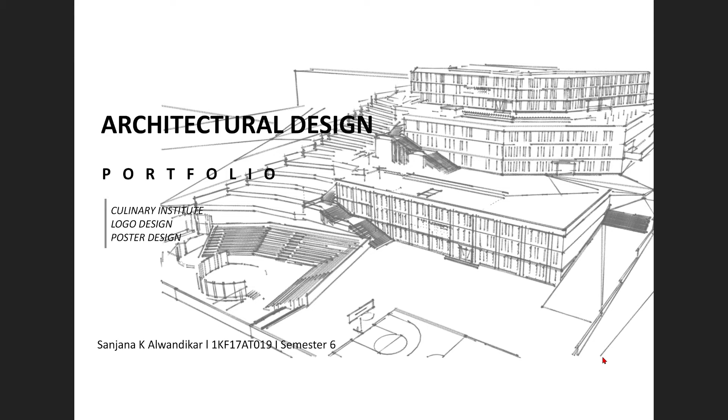Starting with the design of Culinary Institute, the site is located in Malasandara, Bengaluru, and in the context of the site, there are institutions and residential plots. As you can see, it is a highly contoured site which is about 3.5 acres.

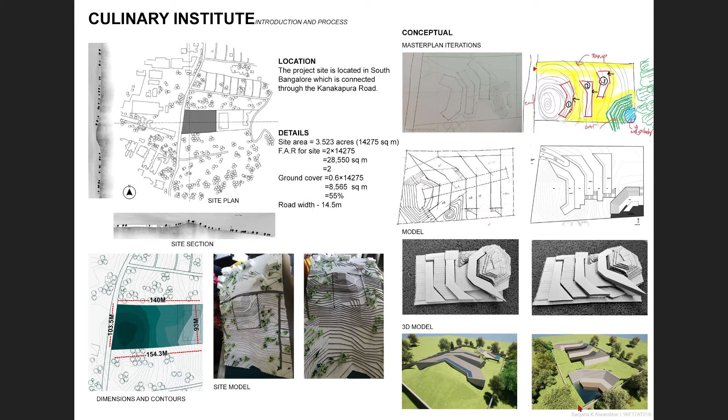In the design process stage, sections and iterations of plans are done to understand the contours and heights, and also physical models and 3D models are done to have a better understanding of the contours and placement of blocks, and also to get the overall look of it.

Now, looking at the concept and approach to the site, at the entrance of the site, there is an 8-meter tall mound. The idea was to retain the mound and respect nature, and also create an intersection between man-made and nature by leaving most of the site to the green and having green spaces in and around the campus.

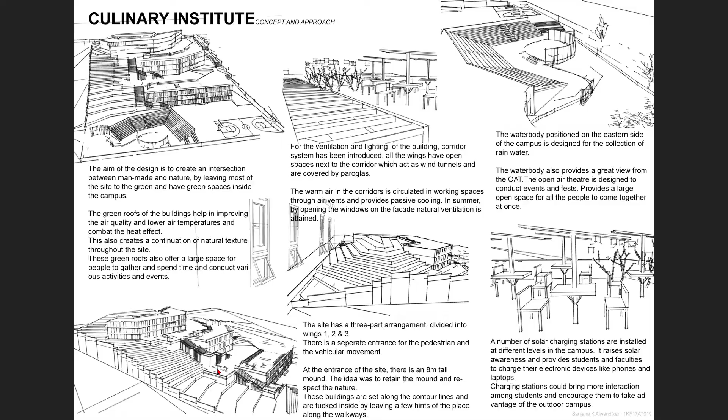The site mainly has a three-part arrangement divided into wings 1, 2, and 3. There is a separate entrance for pedestrian and vehicular movement, and also a combination of stairs and ramps walkway which leads to various levels in the campus.

These buildings are set along contour lines and they are tucked inside, leaving a few hints of the place along the walkways. The site section shows the heights of these wings: the topmost wing is placed at 0.3 meter, wing 2 is placed at minus 9.7 meter, and the lowermost wing, wing 3, is placed at minus 18.3 meter.

All these three wings are G plus 2 blocks.

Green roofs have been introduced in the terraces of the buildings, which helps in improving the air quality and lowering the temperature and combating the heat effect. This also creates a continuation of natural texture throughout the site, and these green roofs offer a large space for people to gather, spend time, and conduct various outdoor activities and events.

The terraces of the buildings have been utilized to provide seating spaces and solar stations. A number of solar charging stations are installed at different levels in the campus. It raises solar awareness and provides students and faculties a way to charge their phones and laptops. Charging stations could bring more interactions among students and encourage them to take advantage of the outdoor campus.

As the mound descends, there is a water body positioned on the eastern side of the campus, designed for the collection of rainwater. The water body also provides a great view from the OAT. This open air theatre is designed to conduct events and fests.

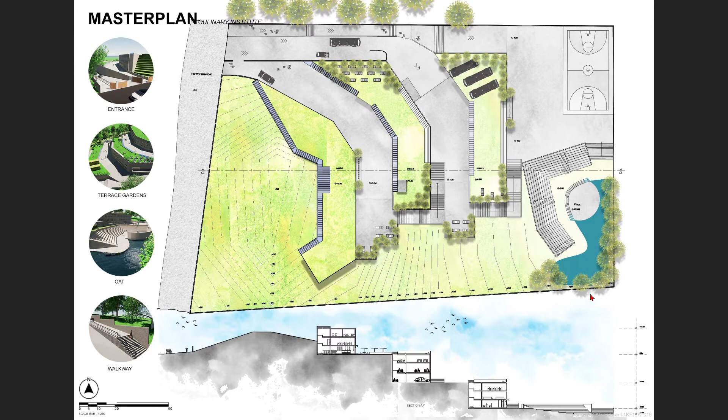Moving on to the details of these wings, firstly for the ventilation and lighting of the building, a corridor system has been introduced. All these three wings have open spaces next to the corridor which act as wind tunnels and are covered by pergolas. The warm air in the corridors is circulated in working spaces through air vents and provides passive cooling. In summer, by opening the windows on the facade, natural ventilation can be attained.

All these three wings have a central stair core and elevator. The pedestrian entrance leads directly to wing 1. It is set as the main wing because it includes functions like the reception desk, waiting lounge, faculty room, principal room, conference room, and a clerk's office.

As you can see in this section, the terrace of Wing 2 can be accessed from the ground level of Wing 1, where there are a number of solar station seating spaces, and also the topmost level of Wing 2 can be accessed from the roof.

In the upper floor of Wing 1, there are culinary kitchen, classrooms, cold and dry storage, student locker rooms, and a maintenance room. In the last level, there is a huge library, another cold and dry storage, and a pastry studio and bakery. In front of this wing, there is a stairway leading down directly to the entrance of Wing 2.

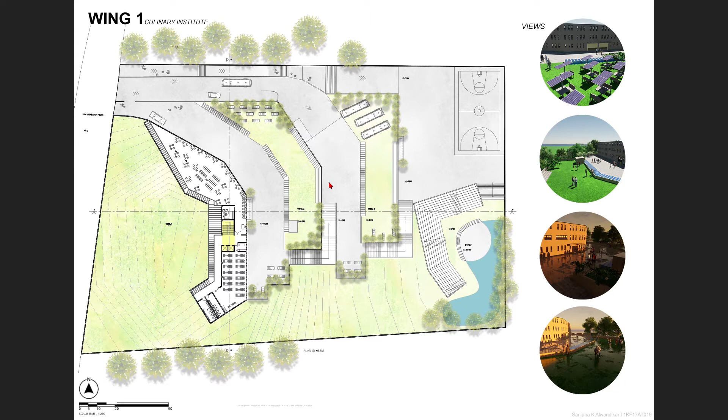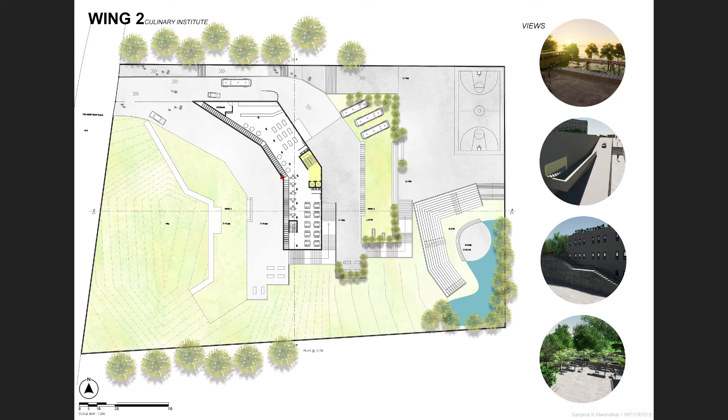Wing 2, being the central wing, can be accessed from the ground level and from the roof. It includes two floors of parking for two-wheelers and four-wheelers. The ramp from the entrance leads directly to the lowermost level and the mid-level of Wing 2. The canteen, being one of the important functions, is located in the central wing, making it easier for students to access from both Wing 1 and Wing 3.

Similar to Wing 1, the terrace of Wing 3 can be accessed from the ground level of Wing 2, where there are seating spaces, other solar stations, and bus parking provided. Next to it is a stairway leading down to the entrance of Wing 3.

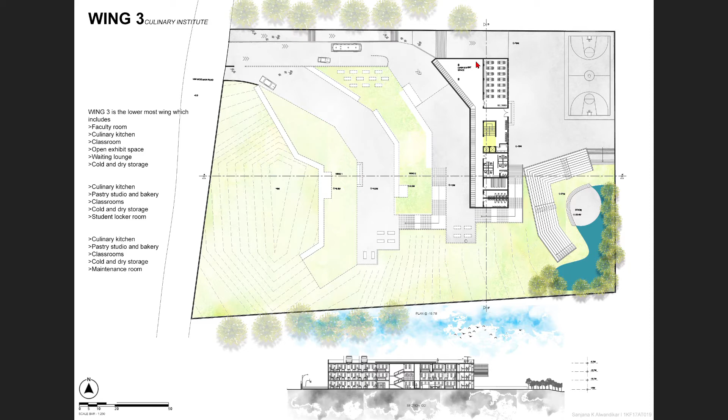Wing 3 is the lowermost wing, which includes functions like faculty room, culinary kitchen, classroom, exhibit spaces, waiting lounge, cold and dry storage, pastry studio and bakery, and a maintenance room. In front of Wing 3, there is a large open space and an open-air theatre. This wing can be directly accessed from the walkway at the entrance.

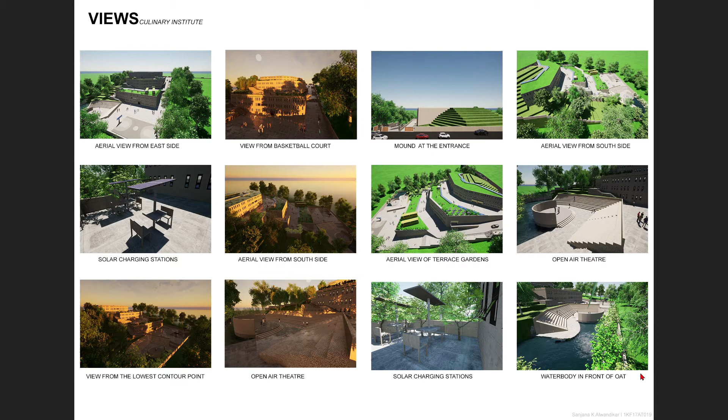So here are a few 3D views of the institute at different angles. Now let's take a look at the walkthrough of the Culinary Institute.

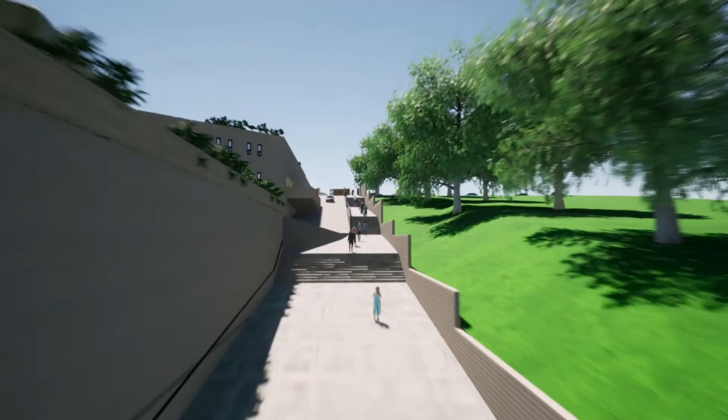The last project is logo design. The app assigned was Google. As we all know, Google is a search engine that we use in our day-to-day life to search for information. The colors found in the Google logo are blue, red, yellow, and green. These were chosen because they are primary colors.